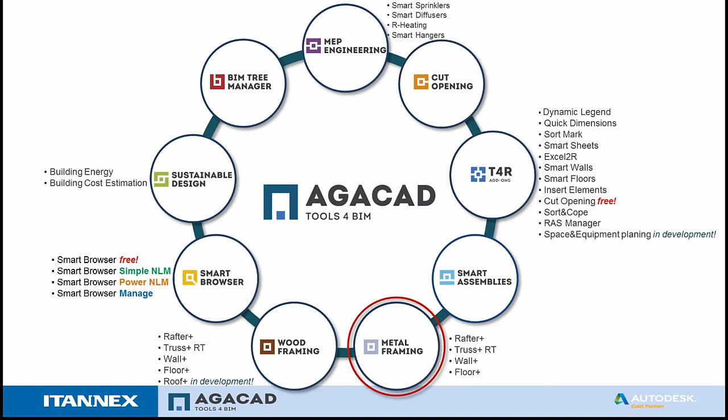And in a very similar scenario, we have Metal Framing. Again, here in this part we have 4 solutions: Rafter+, Truss+, Wall+ and Floor+. Wall+ has intuitive automated framing functionalities for metal wall frame design and for making shop drawings automatically. Actually, at the moment we work on a new version of Wall+, so in the near future we're going to release a new version, and today I will try to show you new features of the new version that is coming soon.

Also, after making the frames, anytime you can make an export to CNC machines if it's necessary. At the moment, we did an export to Metrol, Howick, and Pinnacle machines, but it can also be done to any other machines if needed. Then Floor+ goes for metal floor framing automatically, and it generates floor metal framing members, including joists, bridgings, blockings, rims, noggings, and at the same time it makes shop drawings automatically.

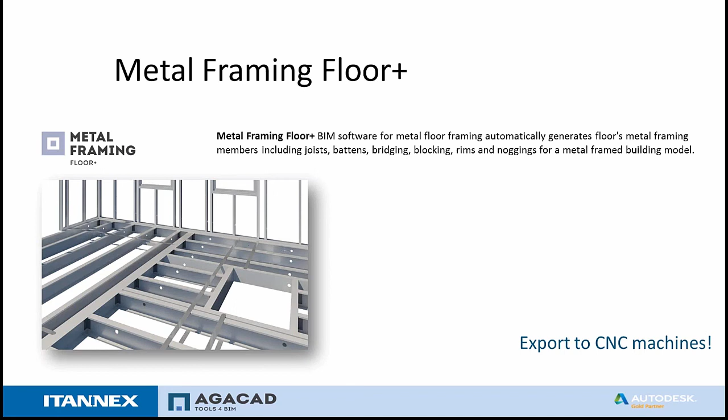Then Rafter Plus: this application gives you the opportunity to easily make steel elements on the roof according to your roof shape. So in general, you can create any roof shape, or it can come from architects, and you can very easily frame the roof according to your rules.

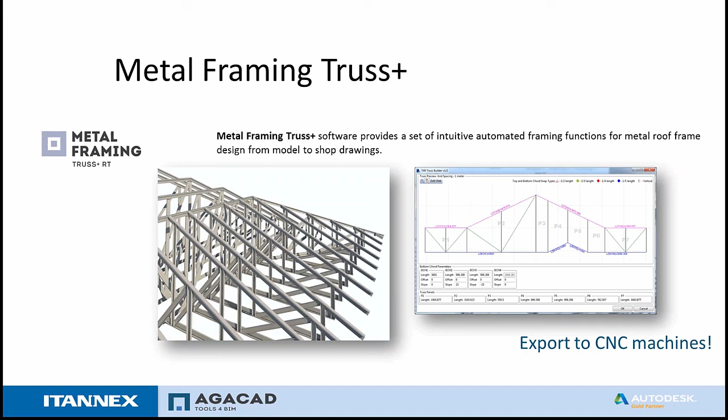Then Truss Plus, it goes for making trusses, and again it goes for making shop drawings for the created trusses. Okay, so now I'm switching to my Revit project. You can find metal framing in the dock tab in the store. Here you can find, for example, Floor Plus M or Rafter Plus M. So as you can see, in general, Rafter goes for the wood, and if it has Rafter Plus M, it means that it goes for the metal framing.

So in general, you can very easily install and try the product. After installation, you can find the products in the separate Tools for Revit Metal Framing tab. And here we're going to start with Wall Plus M. Now, the first thing that you have to know about this product is that it can support C+C and C+U systems. I will show you our sample project with different systems.

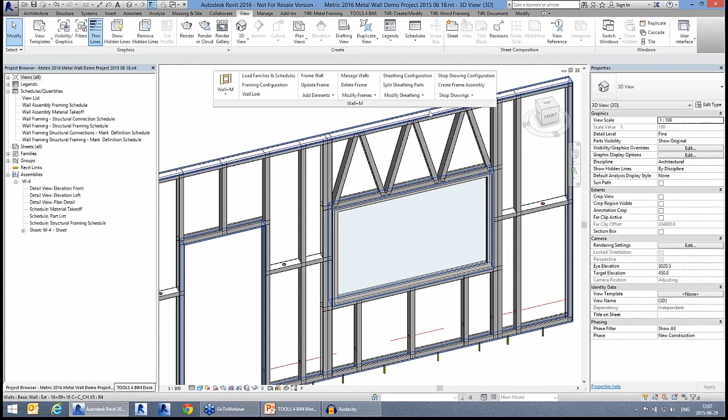So as you can see, this is an example of the C+C chamfered system. The tracks and the studs are created according to this. We have C profiles for the studs and C profiles for the tracks, and the ends are chamfered, as you can see here. Then we can have one more system. It's like a regular C+C. Again, there could be different connections used in making this frame; in this case, this is a totally different connection from the one we saw previously.

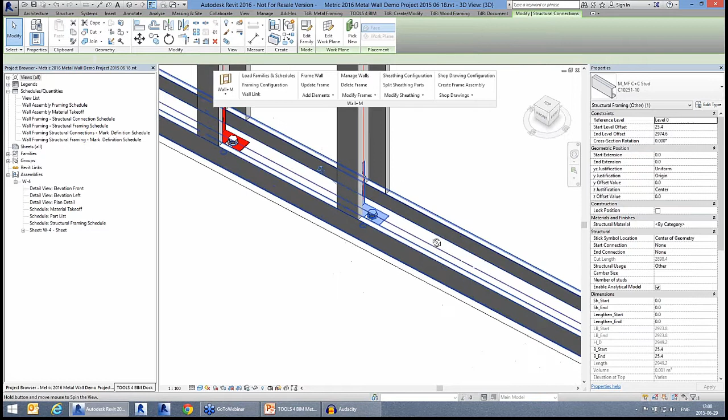Actually, you can modify the families of those connections, and you can create your own families. We provide examples of the families together with the products, but in general you can use your own if needed. Then we have C+U special framing. Again, for the tracks we use a U profile, and for the studs we use a C profile. Okay, and as you can see here, we can have such cripples above the opening.

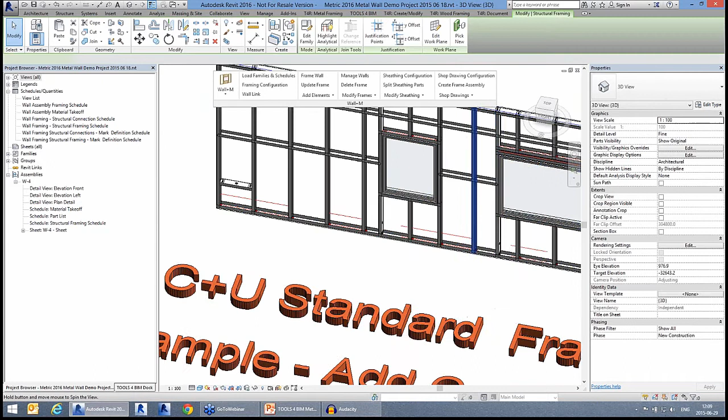One more example is C+U standard framing. Here we can take a look again. We have connections between those studs and tracks, and this is how the system looks in C+U standard framing. One more example is C+U special frame. Okay, so it can look like this. Also, the tool can support different shapes of frames. And one more example with added connections for C+U standard framing.

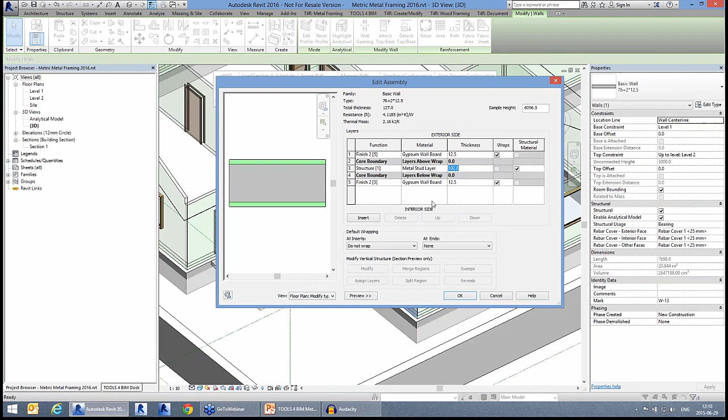Okay, so now let's start from the beginning, with a brand new project. I'm going to show you different scenarios. This is the wall. Actually, this wall just comes regularly from the architects. Let's take a look at the wall type. As you can see, there are 3 layers: a metal framing layer and 2 gypsum wall layers on both sides. So to this wall type we're going to add C+C profiling. In my case I have just one layer for the metal frames, and here we're going to add C+C profiling.

What you have to do is just select walls from the project and press Frame Wall. After framing the wall, the tool will take parameters from the wall type. The tool will look at what kind of wall types you have at the moment, and what the thicknesses and layers are, and then the tool makes a connection between the wall type and the configuration from Wall Plus. In my case, I did a link before, and now the tool is just framing the wall segments.

So in general, after preparing sample configurations, the most popular configurations used in your projects, you can very easily save those configurations on your computer. Later you can share them with your colleagues, and you will be able to use those settings in a new project. Okay, so 2 walls are already framed. In my case, I have selected 5 walls from the project.

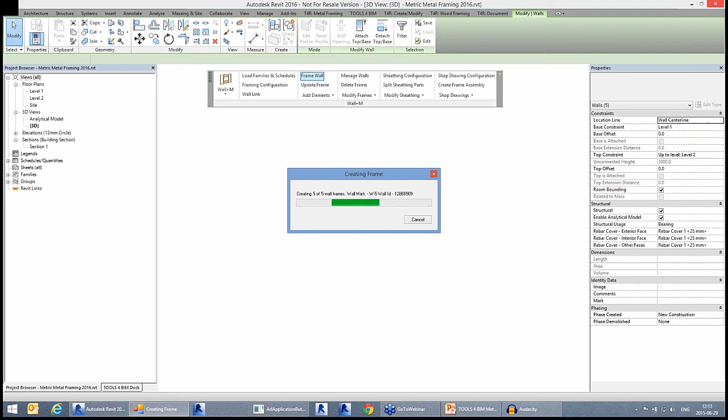And that's it. Here we can take a look into the sample with C+U. As you can see, for the tracks we use U profile and C for the studs. Okay, then we can take a look into one more example. Here we have C+C profiling.

Now let's check how it works, and actually how we can improve and how we can change configurations for framing the walls. So framing configuration is the main button in Wall+M. Here you have to predefine your configurations, and first you have to start with configuration type. So it will be used for the main frames or for the secondary frames, because in the wall you can have two layers, or actually there are no limits. You can have even maybe 3 or 4 framed layers in the wall.

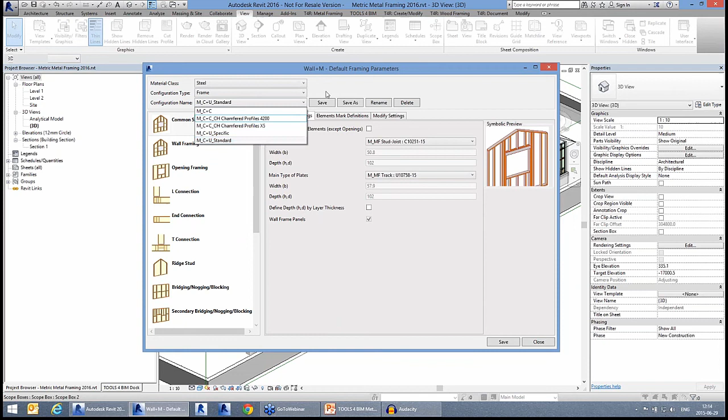So here you have to choose configuration type and then configuration name. Those configuration names come together automatically with the software. These are the most popular configurations that we have created, but anytime you can save it with your own name and save it for your future projects.

Now in the common settings, you have to predefine what families you're going to use for the plates and for the studs. Again, those families are our created sample families. They come together with the software after loading the families into the project. But anytime you will be able to modify that if it's necessary.

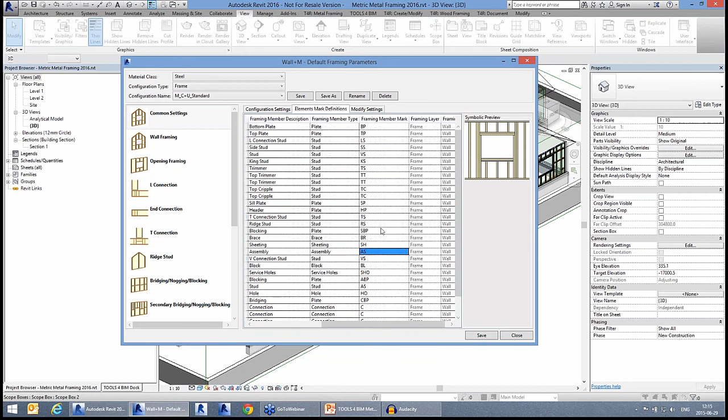Now with the element mark definitions, the tool provides you a list of subcategories and the element namings for all framing members. So in general, you can add your own names. This is very important, because descriptions and the member names will be used later in the schedules. The same as framing member mark, because according to this mark, the tool will remember all your frames.

Now, in the wall framing, you have just to choose the distances between the frames, how you want to distribute them. Then you have to predefine the top plates. There will be one top plate or two or maybe three top plates. Then there are settings for the bottom plates. Actually, it's very good to use Wall+M, because after any changes you can see how it will look in the end. So there is a symbolic preview here in the right dialog. If it's necessary, you can add additional offsets from the wall base or top.

Then with opening framing, you have to predefine how your windows, doors or other openings will be framed. And here you can predefine settings for the windows, so what kind of king studs you're going to use, what kind of header type you're going to choose, what will be the sill plates, trimmers, other studs or additional offsets around the window.

Then there are settings for L connections. You can predefine settings for L outer corner or butt outer corner, and the same we have for the inner corners. So now you will be able to choose and to predefine configurations for different corners. It could be predefined for the inner corner, but at the same time for the outer corner. Then we have a tab for end connections. Then we have a tab for T connections.

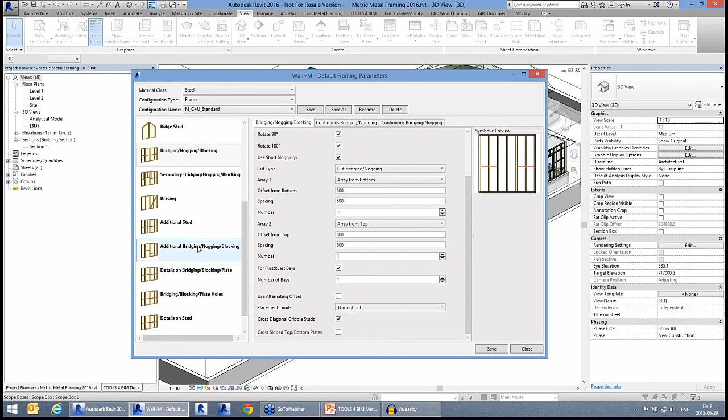Okay. Then we have bridgings and blockings. As you can see in my example, additional bridgings were automatically added. So here you can predefine the rule where exactly you would like to add the bridging or additional blocking. And it can go through the wall segment, or it can go only through the openings if it's necessary. Then there are settings for adding bracings, additional studs, additional horizontal elements, and then there are settings for adding details.

As you saw in my sample, I have used different details in the project, different connections. So here you can say that, for example, there should be anchors added in the middle between the studs, or there should be angle connectors added on the open faces of the stud or plate. So here you can predefine different rules, how exactly you would like to distribute connectors, anchors, or some bolt holes, and so on. Then we have a separate tab for adding the service holes for the wires, for example, and then for adding additional details or holes for the studs.

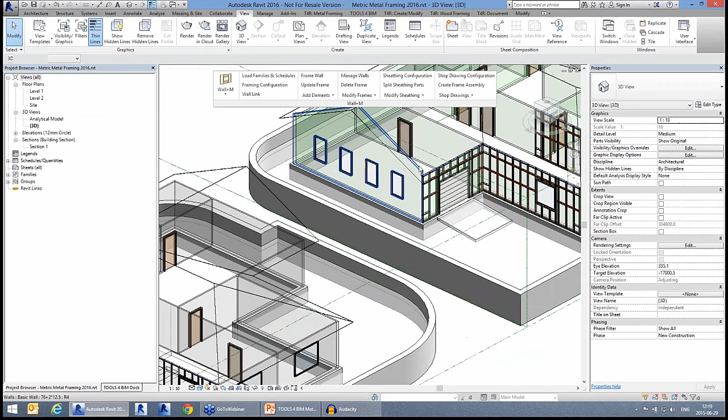After predefining that configuration, you can save it under your own name, and then you need to make a link between your wall type and configuration. It's very easy - the tool shows you the wall types that come from the project, and you have to choose what exactly you're going to put into every layer. So let's say into this layer I'm going to add the main frame and use this C+U standard configuration.

Then there are sheetings from both sides, and in the new version coming in a few weeks, there will be an option to predefine sheeting configuration, because you will be able to split sheeting into separate parts. In my case, I've already added sheeting here, and I'm going to split the sheeting into separate parts.

One more example - a link between this wall type, and in this part of my building, I'm going to use some C+C template configuration.

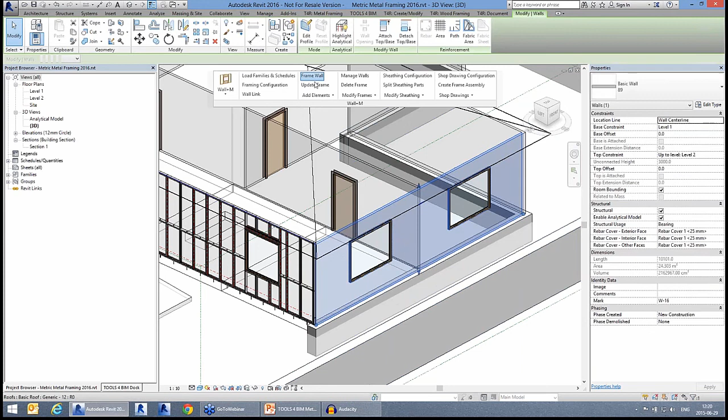Just one more example, I'm going to frame this wall to show you that for different opening sizes or window sizes, you can predefine different headers and different framing configurations. As you can see on the left side, the headers above the window are just straight, but here above this window we're using a varying configuration, because this window is larger than that one.

Now what else can we do with such walls? We can add any additional elements we need. If we look into add elements, we can add additional studs to custom places in special project areas, and we can add additional bridgings or blockings.

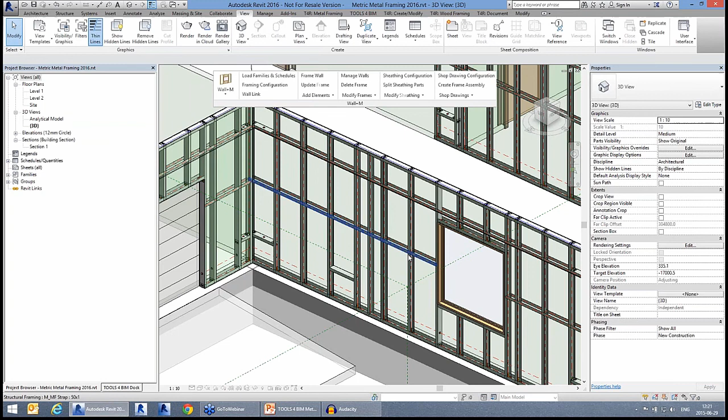You can very easily predefine the offset. Then we can add additional bracings, but also, if you make any changes in the project - let's say if I'm going to move a window - anytime you can select any frame from the wall and press update frame, and the tool will easily update the frames according to any changes you make.

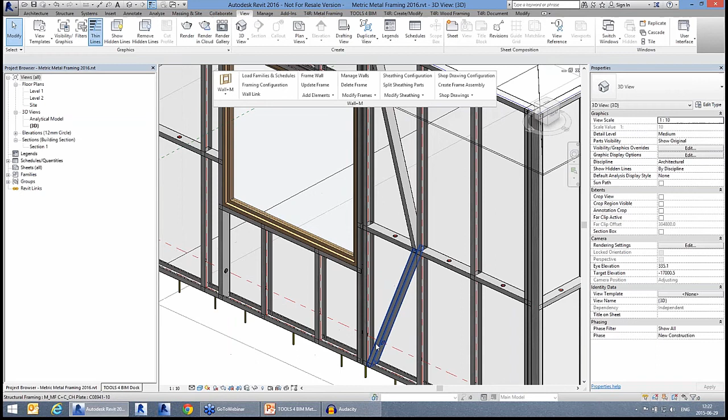Now if you want to add additional bracings, you can very easily add them between the horizontal elements - like this. You just need to click the points where you want to add the bracings, and the tool will add them between the horizontal points you select from the project.

Now if you'd like to make changes in configuration, anytime you can go to modify frames, then modify wall framing, where you can modify the opening framing. We can select and say that top and bottom trimmers should be added for this opening, and after pressing OK, the tool updates the opening framing only for this selected window.

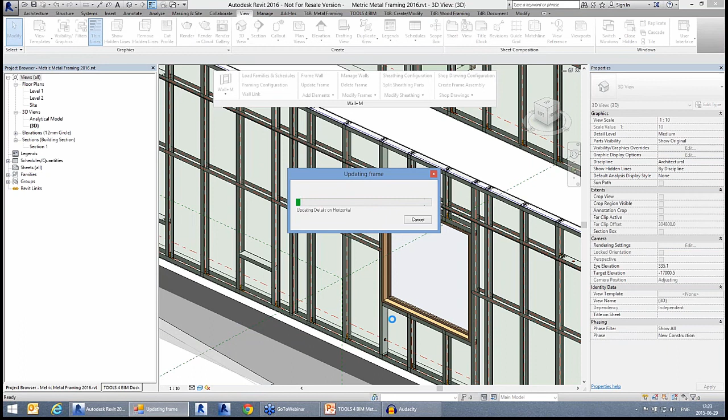So in general, you can predefine a common configuration used for all walls, but anytime you can still modify some custom openings or special parts of your project. And the trimmers are automatically added.

Now, as you can see, the new version has more options for modifying sheathing. With the current version, if we switch on parts, the tool creates the parts automatically. If we look at the parts, this part is a sheeting - the tool adds information to it automatically. But if we look only at the sheeting, it's not divided into segments - it's just one sheeting, one part for the total wall segment.

In the new version, we've added the possibility to split the sheeting into separate segments. First we have to go to the sheathing configuration, where there are settings for how you'd like to split the sheeting. You predefine the sizes for the vertical elements, then distribute them horizontally - you can split it vertically and then horizontally.

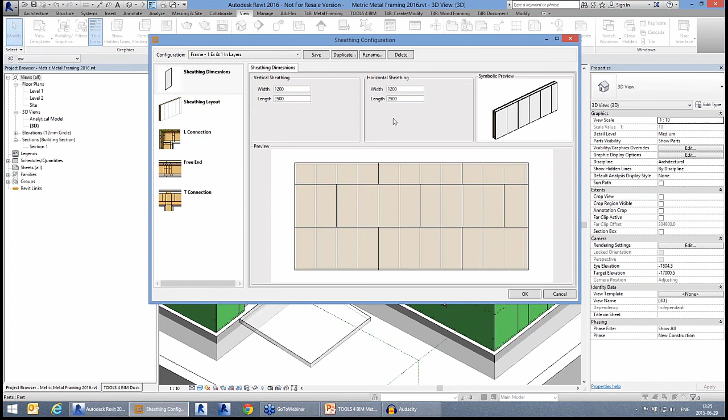Then with the sheeting layout, you'll be able to predefine settings for different sheeting segments - it can be inner sheeting or outer sheeting, and it could be secondary or the first. So in general, we've added an option to have even two sheetings, not just one from one side or the other, but two sheeting segments from the outer side or the inner side.

And there are different options for how you can work with them. If you want, you can add some additional offsets. Here you have to predefine the rule for the direction of the sheeting.

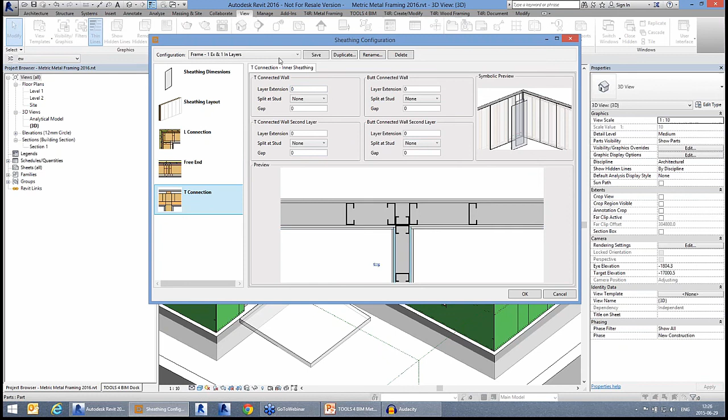Then we have L connections. There are different options for how the L connection should be created for the outer or inner corners. Then there are settings for the free end connections, again for the inner sheeting or the outer sheeting, and the same with the T connection. Again, you will be able to save the configuration under your own name.

After making this configuration, you will be able to split the sheeting into parts. I have to pick any frame from the wall, and that's it. The tool has created the sheeting, and now if we take a look into the sheeting view, as you can see, we already have splits in this part of our project. Okay, let's do the same and split this part of the wall, and that's it, we have already split it.

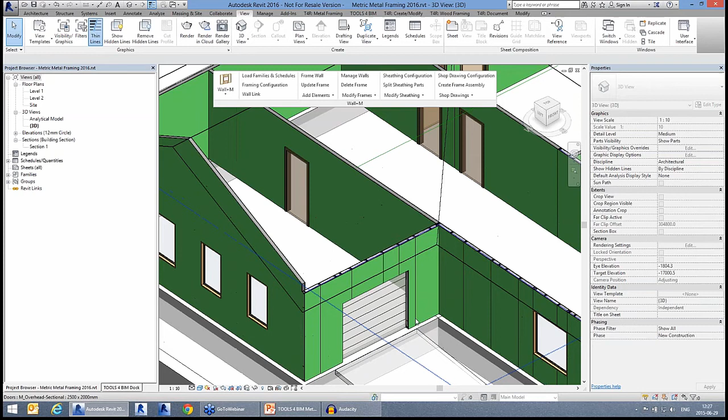Now if you want, you can modify the sheeting. You can make small adjustments and predefine how exactly you would like to make an area from the left side, from the right side, or from both sides. In general, you will be able to modify that after splitting the part.

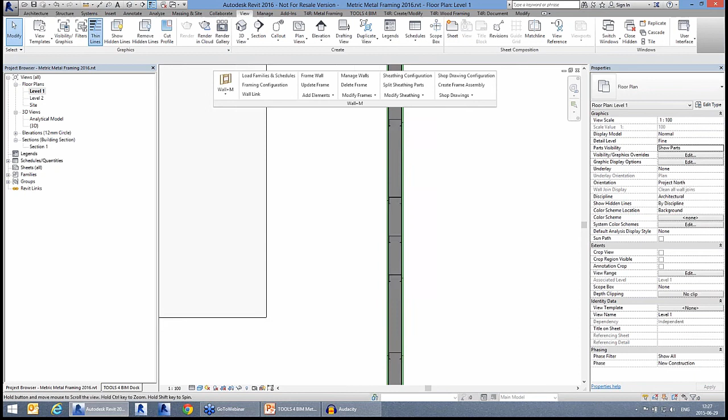Again, if we take a look into the plan view, we can see that here we have parts, and here we have splits between our frames. After making those changes, after framing the walls and splitting the sheeting, we can make shop drawings.

In general, we have to prepare our own shop drawing configuration. You have to choose what kind of views you would like to have in your assembly, because the tool is going to create assemblies. The tool will collect all frames, connections, and the sheeting, connecting all elements from the wall, and prepare shop drawings automatically.

You have to predefine the views, so you have to predefine what framing layers you're going to present in every view, and then the view template. It's a regular view template that comes from your project, and you can predefine the graphical design of it.

Then you have to choose the title block, the part lists, material takeoff, and the schedule templates that come from your project. You can predefine your own schedules with your own design, and the tool will use those schedules as templates for making your part lists or material takeoff for every wall.

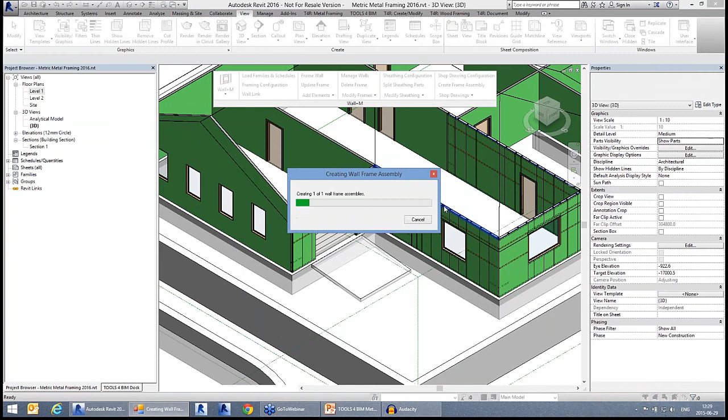Then we have to choose dimension types, just from the project, that I'm going to use for the vertical, horizontal elements, and for the studs. And that's it, we can save this configuration, and I can create my first assembly. I have to pick any frame from the wall, and now the tool is going to create shop drawings.

So the tool will collect all elements from the wall segment. It will collect all the frames, connections, and the sheeting, and it will prepare shop drawings. It will create a 3D view, front side view, one front view for the frame, one front view for the sheeting, and then it will create schedules.

And the tool will add dimensions automatically on every frame and on every sheeting element face. Okay, I think we're finishing with making the assembly for the first wall.

After creating the assembly, we can see that this is a regular assembly, and the tool added automatically some additional information, like for example mass, so you will be able to know what is the weight of your prefabricated assembly. And that's it, we can take a look into the result. This is our 3D view, and then we have a front side view with dimensions.

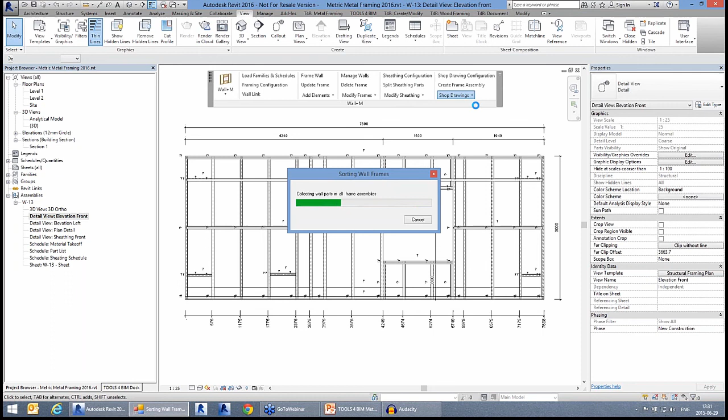One more thing we have to do is renumber our structural frames. We have to press on sort structural frames from the Wall+M. The tool will renumber elements according to its purpose and length. It will be visible in the front side view, and the same information will be visible in the sheet schedules.

Okay, we're going to do the same with connections.

Okay, let's check other views. So this is our plan view, then we have front side view, okay, with the sheeting layouts. Then we have material takeoff, then the part list, and then a separate table for the sheeting.

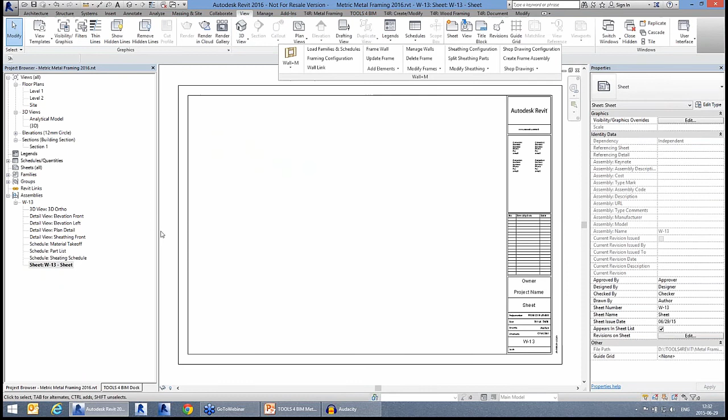Now we're ready to place this information to the regular sheet. Here I'm going to add the regular front side view, then the view with the sheeting, then plan view. And here I'm going to add the schedule with the sheeting, and then the schedule with the regular part list. So we have all information about every view and the wall.

Now we can come back to our shop drawing configuration, and we're saying that this sheet will be used as a template for making our future sheets.

Now I'm coming back again to my previous view, and again we can create assembly for another wall. So now the tool is going to do the same thing: collect all views, collect all elements, prepare all necessary views, add dimensions, add tags. At the same time, the tool will place those views into the sheet automatically, taking the previous sheet as a template and placing the views into the same place as in our template sheet.

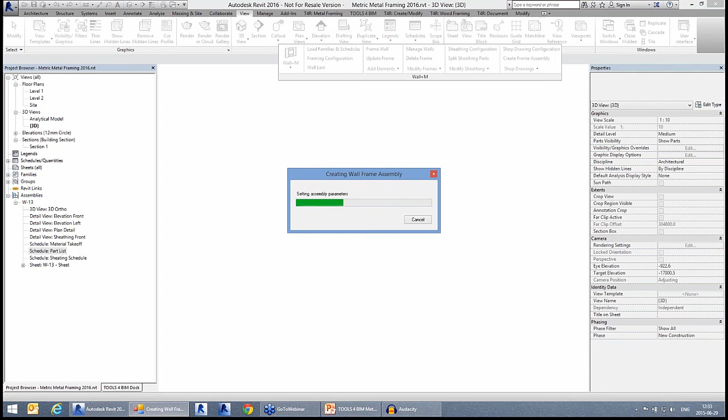Okay, and that's it. We can just open our final sheet, and here we can see the result. So you can imagine how much time you can save in preparing such views and in preparing such framing.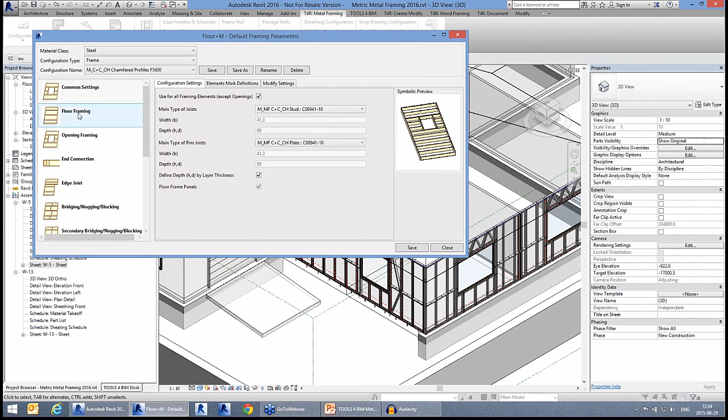You have to predefine the distances, you have to predefine the families that you're going to use for the rims and for the common joists, then how you're going to frame the openings, what will be the end connections, if you want to add additional bridgings or secondary bridgings, noggings and blockings. So there are very similar settings, and then you have to make a link between

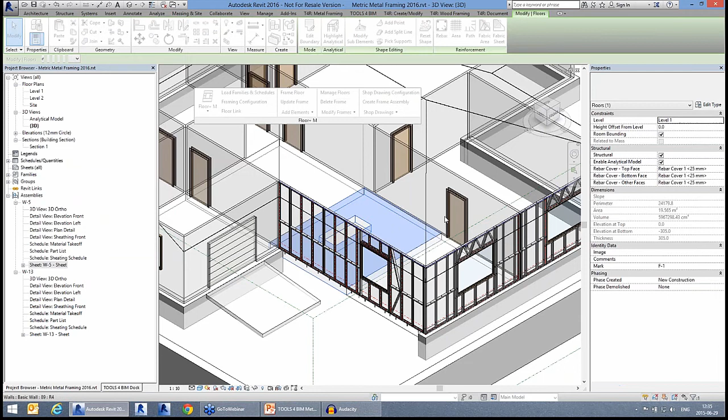your floor panel and your configuration. In my case, I'm going to put the main frame in the top and then battens in the bottom of this floor segment. And that's it. We can just press on frame floor, and now the tool is going to frame this floor, and then we're going to add battens into the second layer.

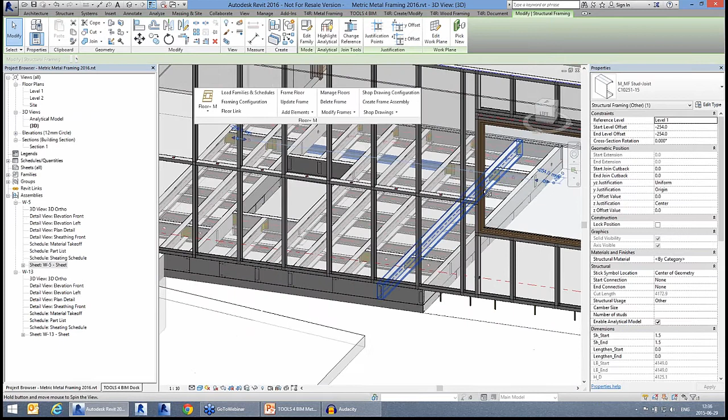Okay, and we have the floor frames. As you can see in the connection, we have details, so there are L connections added automatically between the frames, and then let's add battens. And that's it, the battens are added automatically below this main floor segment. And the same scenario as it was with the Wall Plus, you can make shop drawings, and you can make assembly.

The tool will add dimensions automatically, and the tool will put the views into the sheet.

Okay, now let's switch to Valence's screen, and he's going to continue with framing your roof, so with adding trusses and with making rafters automatically.

Okay, hello to everyone. I hope you see my screen now. Yes, we can see you.

Okay, so as Renata told you, I will show some solutions for how to frame roofs with light gauge steel elements by using our solutions. I will demonstrate Rafter Plus M and Truss Plus M tools. So let's get started.

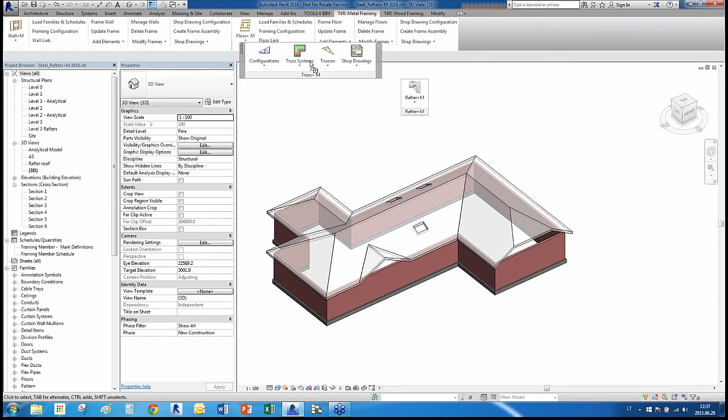This project is a sample project where I will demonstrate the Rafter tool. I will just begin, I select the roof, and okay, so this is the tool Rafter Plus M, and again you have to load families to your project first of all, and then you use all the possible commands to create your elements.

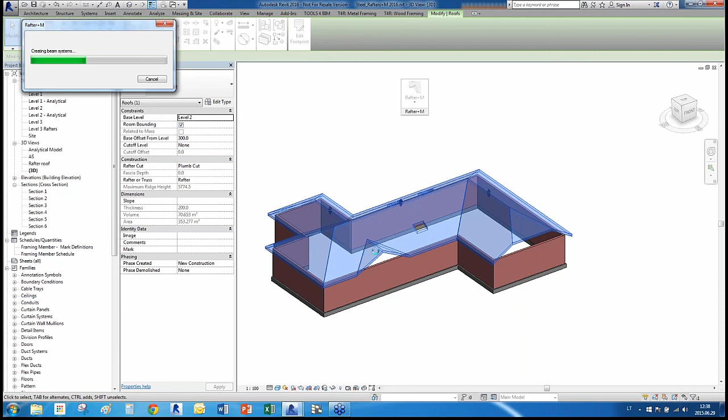I have already loaded families, and I will now create common rafter systems on the roof. Here I have end connection selection options, beam type options, and spacing options and where to place it. I will leave it like it is now, click OK, and we will have a beam system on every slope of the roof with predefined spacing.

And you can see now that we have a beam system on every slope of the roof with fixed distance between them.

So let's add other elements, and we will update the rafters, openings, and so on later. Next, I will select all the beam systems of the roof and insert hip and valley rafters in the intersections of the beam systems.

I select the end type, the type of beam I will use, so I'll use double elements, and click OK - this is for the valley rafter. You can insert one valley or hip rafter at a time if you select beam systems near each other, but I'll just select and insert all hip and valley rafters at once to fill the whole roof with the necessary elements.

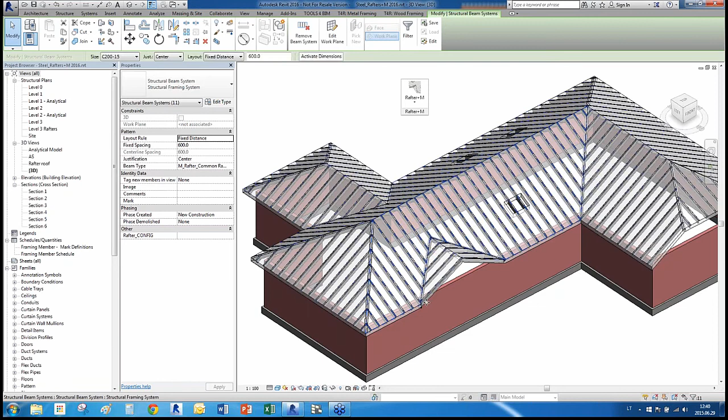Okay, so we have here a hip rafter inserted. I have valley rafters, and it's all over the roof in every necessary place.

Let's insert other elements. I will select two beam systems, on the slope and the slope, and insert a ridge beam between them. So again we have a configuration window - we choose the vertical positioning option, the type of beam, the distances, and so on. After we click OK, we will have the ridge beam inserted according to our configurations.

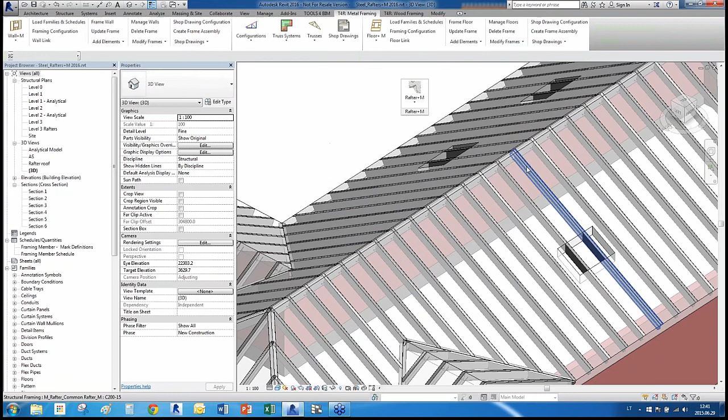So you can insert between two beam systems, or between two rafters. Let's say from here to here - you can insert the same ridge beam. Now we have the ridge beam inserted, and we will just update later.

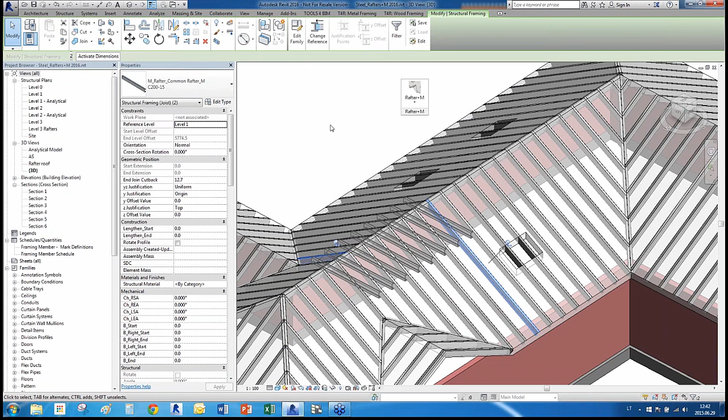Now let's insert some collar beams. I'll select two rafters this time, or I can select two beam systems, and select insert/update collar beam systems - you see it's the same function for inserting and updating. Again we have a configuration window: the vertical distance, the type of beam, the connection type, and let's click OK. So we have collar beams inserted here now.

We can update - let's say I'll select the beam system and rafter again, and prolong this, and change something more, like updating this beam system and changing the distance, let's say 900, and it will move down. So you can update your elements at any time.

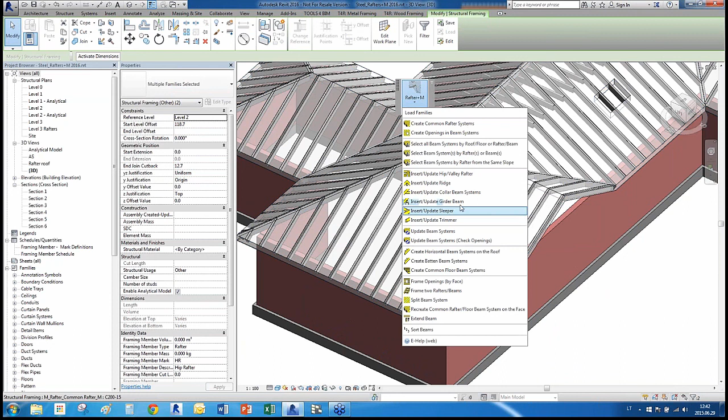Let's go to other elements. We have a girder beam option, so let's insert a few of them. I'll select two rafters and select insert/update girder beam. Again we have a configuration window: the girder placement options, the type of beam. I will enter 0 value here - this is the vertical distance because we don't have the possibility to insert a girder here, so we'll pick a wall and use it for the vertical distance of the girder. I'll click OK.

I will put it in the middle of a wall, but I can also enter values to move it left or right. Anyway, now we have a girder beam - we can insert it like this by using wall type.

If we have the same level of girder, we can select two elements, select insert girder, and choose the option pick source girder. For this I will select this girder, and I have automatically the vertical distances set up. I'll click OK, and now we have a girder inserted at the same level as the previous girder. So we can just go around our whole building using these different options for how to insert them.

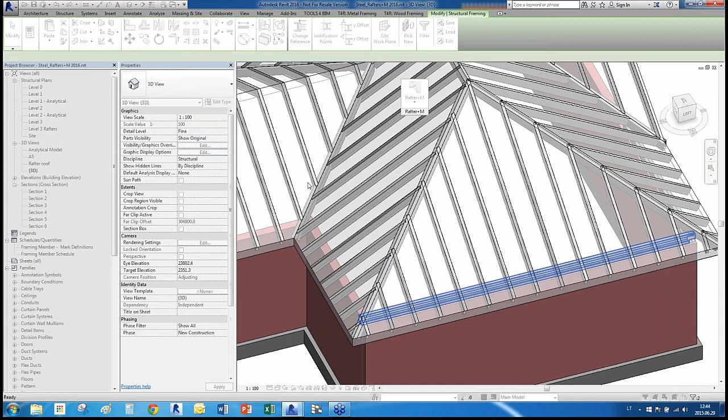I'll select the same option here and click OK, and we have some warnings to notify if everything is like we want it to be. So we can insert girders and go around the whole building - we can insert them here, or here as support girders, and so on, just using the configuration window.

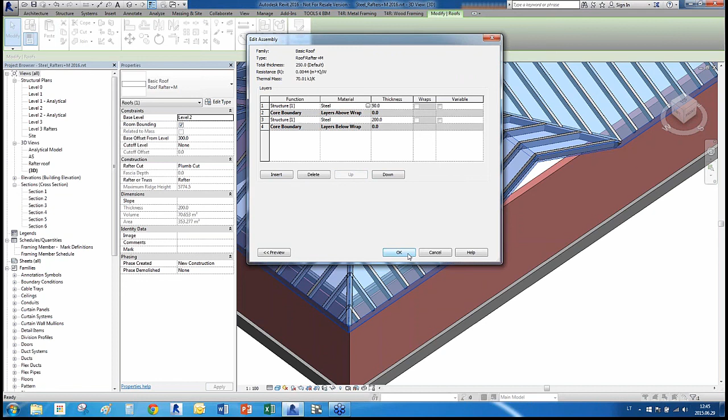Let's change the structure of the roof a bit. I will insert another layer for batten beams - the thickness will be 50 millimeters, and I'll just add material and click OK.

So I'll change the configuration and insert batten beam systems. Now we have the type of batten beam, the spacing - let's change that, let's do it horizontal. Let's click OK, and we will have batten beam systems perpendicular to the rafters, or we can insert them parallel to the rafters - it's up to you.

If you need some air ventilation for the roofing, you can add parallel batten beam systems instead of perpendicular ones.

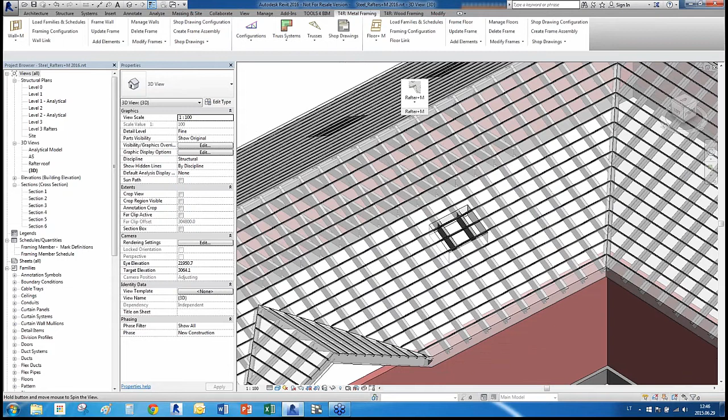So again, on every slope we have the chosen type of batten beam inserted on the top of the rafters and all over the roof. And now we see that our elements are going through the openings, and the connections are not as they should be. So we will update these beam systems. I will select this beam system, and I will select update beam systems and check openings.

So okay, yeah, and you will see that now our rafters are updated according to all the constraints we have here, like the ridge beam, the valley rafters and openings. So we will have now some adjustments. Okay, so we have now here rafters updated according to the opening. We have rafters updated according to the valley rafters, according to the ridge beam, and so on.

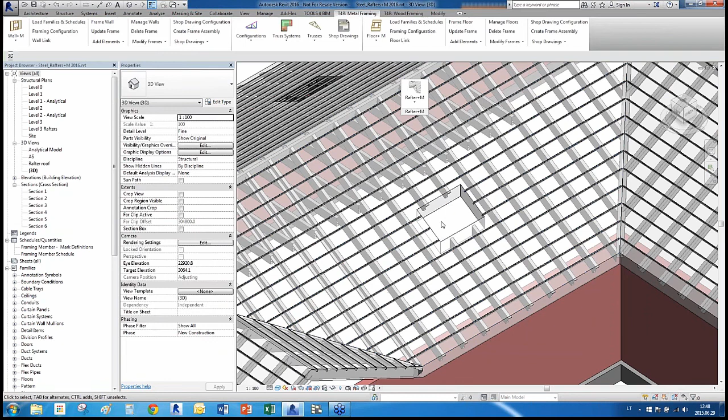So you just need to select the beam system and click update with openings or without openings, and just wait until they are fixed. Okay, so we have the opening here now clear, and let's do the same on the other side. So we select the beam system and check openings and click OK, just to have here a good view as it should be.

Okay, that's a big beam system, so we need to do a lot of cutting of elements. Okay, so we have now both rafters updated, and we have openings updated, and if we move openings, we can again update these rafters and check the design process.

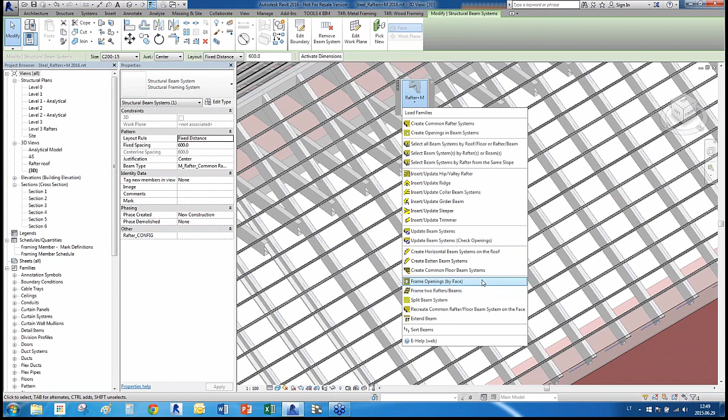Okay, I select the beam system, and now let's frame the openings. We have a separate command for this. Let's click OK, and we have now framing elements inserted between these two rafters, and we see again that rafters are intersecting with framing elements. So let's select our beam system and update again, and yes, now we are just going to the edge of the framing elements.

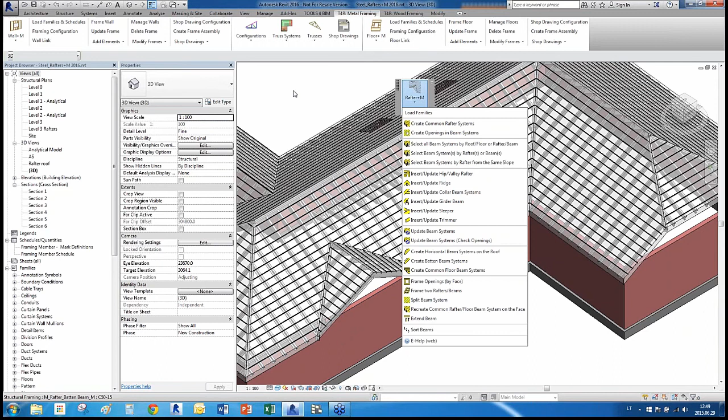So let's now see some other tools. If on every slope we have a beam system like this, we have only one option of justification and layout with this one distance. But if we want more flexibility to have different spacings in different areas, we can do this with our command split beam system.

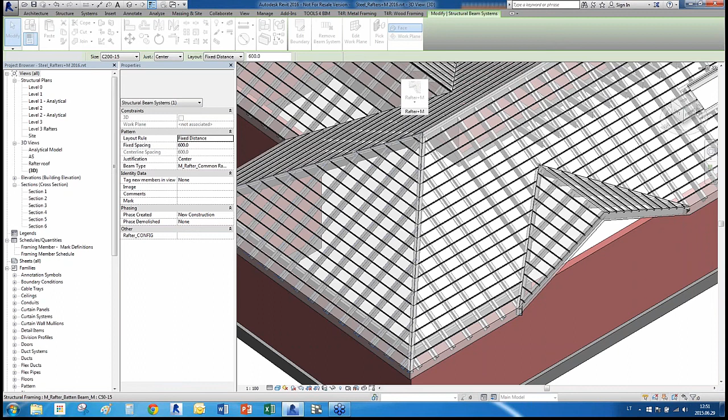Let's try to use this on this beam system. Let's use split beam system here, and you will see that now we have a configuration window with a defined spacing. We can set up the distances from the edge of the roof, and we have a distance of 1000 in the middle, so we can insert an additional beam. Let's click OK and see the result. You will see now that we have 3 beam systems which you can configure as you want.

I have here a beam system, I have a beam system in the middle of one beam, and we have here a third beam system. So we can set up different spacing, and we can divide these beam systems again. And let's go to the plan view. Let's see.

I will select this beam system, and I will select this rafter, and I will click again split beam systems, and I will enter here the value for splitting, and again I will insert an additional rafter. So let's see. Now we have a different distance of this rafter, and this rafter distance will be the same now from the edges of the roof.

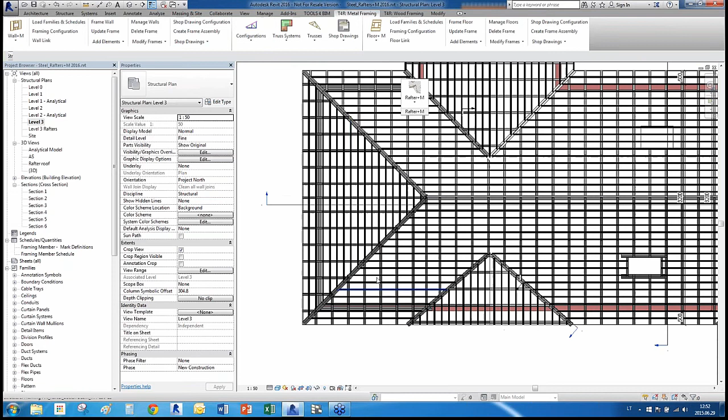So if it's my design wish, I can do it like this with the help of this tool, because in simple Revit you don't have these options to split beam systems. Okay, so we have here again a beam system and the beam system here, so you can set up different spacings and so on, align all the rafters and get more flexibility in your design work.

Okay, and the last option I will show is to sort beams. When you click sort beams, it's the same as in the wall framing solution. You had some sorting, so you have sorting also here.

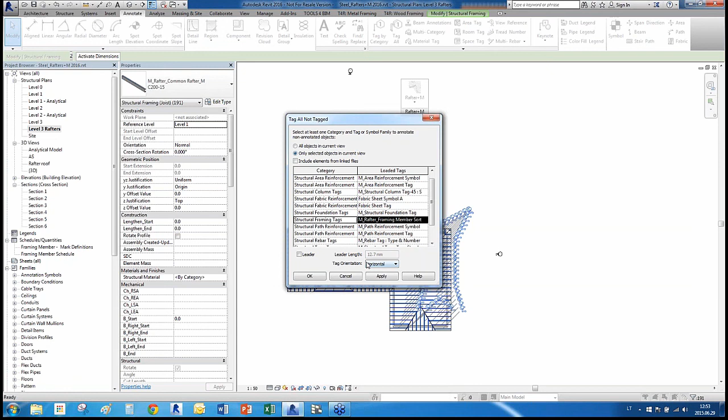And after sorting, I will add some tags, tag all, and I will filter this and leave just structural beams, and I will now add some structural framing tags. Okay, horizontal and without leader, and click OK. And you can see now that we have different sorted markings for the rafters and for the batten beams and so on. So it's just a quick renumbering of the elements, so it saves you time also.

Okay, so that's basically what I wanted to show you today. We have some other options, but these are the main commands I showed you, so I hope you get an idea.

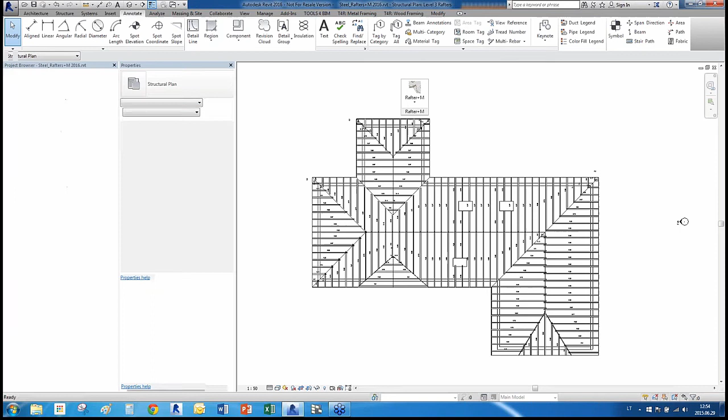Okay, and let's just switch to another solution now. I'll close this one. Let's go and do something with trusses. Let's see how they work. Again, I have a sample project here, and okay, I'll just take another tool. Let's place this back, and let's use the truss tool.

So we have here a truss plus M tool. We have configurations here for trusses. We have tools to create truss system grids to quickly create something like this, and we have tools to create separate trusses, to insert trusses, to create truss types by using model lines, and to copy, to modify trusses and so on. And we have the last option here to create shop drawings, quick drawings, to mark elements and so on, to export to CNC machines. Okay, let's just overview some configurations.

First of all, again, you just have to load truss types. When you open the truss database manager, here we can create trusses without going to each of the trusses and assigning some elements and creating each of the truss types. You can create these types here. You create a type, you select the types of the elements for framing elements, and after you click create, you have all these types of trusses created with picked configurations, picked framing family types.

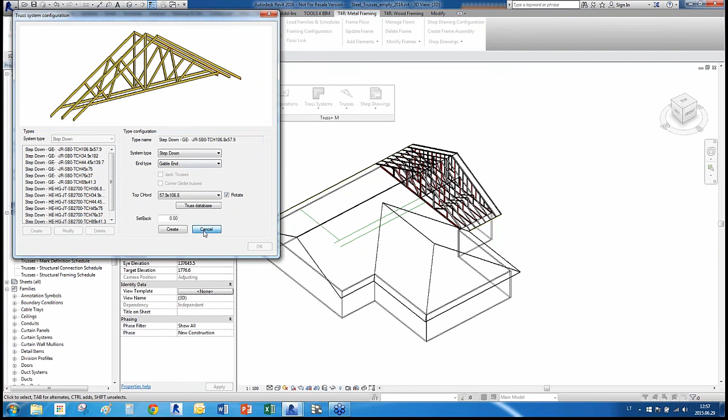Okay, let's see the truss system configuration window. Here you have options to create truss systems, what kind of truss systems you will have. So if I create one, I can select the solution, if it will be gable end or hip end, what kind of trusses we will use for this, and so on. So you create configurations for truss systems and you will use them. I will show you this one in action.

And yeah, truss design settings, the last configuration window. Here we have some options for how to create jack and corner girder trusses. We can configure when vertical webs and diagonal webs will be inserted, according to their minimal length. So we can leave it as default, or we can insert our values here.

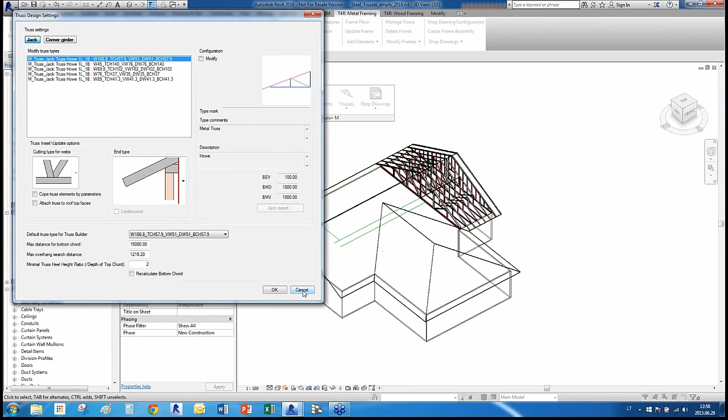So these are the configurations, and we have here some ending types of trusses. We can select this one, and we select the default truss type for truss builder. Truss builder is a tool to create truss types inside Revit, not by using the Revit standard family editor. I will show you how it works later. Let's just get started and insert some trusses into this roof. I have already created some of them here, but let's just see how it goes.

So first of all, I select the roof and I select insert truss system grid. You will see now I select the edges, the boundaries of my truss system, and okay, I'll click OK, and now you see that we have some suggestions from the tool. It suggests we use this step down truss system, or we can choose another one if we want to use other profiles and so on, or maybe we will not use this one.

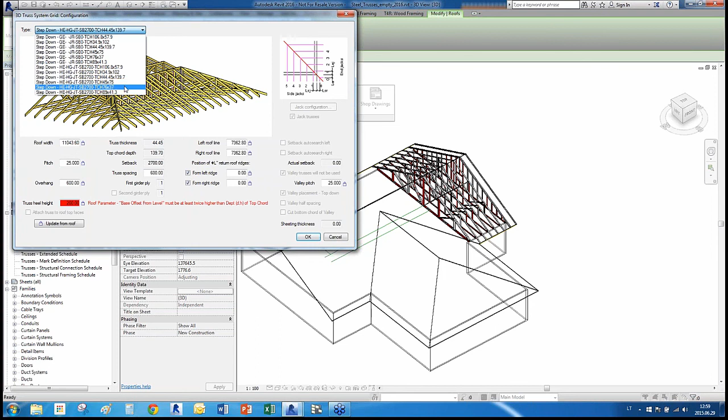Okay, so let's just go back and choose this type of truss system, and we have here already values from the roof: width, pitch, overhang, and so on. Okay, let's click OK, and let's see. The software will insert the truss system grid. It's just a grid, not the trusses themselves, but we create a grid and we can look it over and see if that's what I wanted to model.

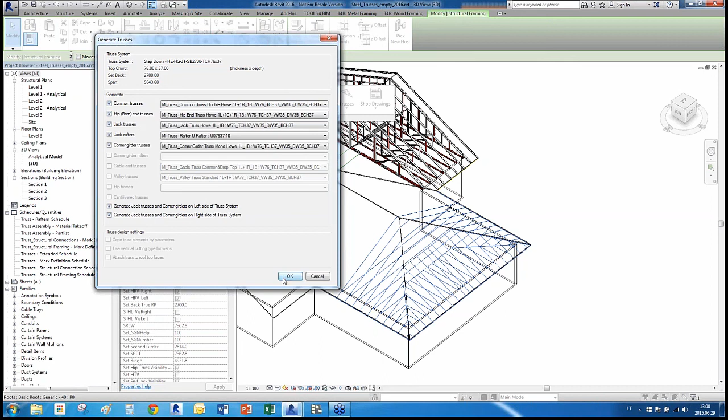If it's okay, then we just generate trusses, or we can modify the truss system grid. We can change some truss spacing or insert another first girder to make them double and so on. So if it's okay, then we generate trusses, and we have a configuration window where we can select the truss types we can use, like fink or howe or modified queen or whatever, for common trusses, for hip end trusses, for jack trusses, and so on. So we pick the truss types and click OK, and now we just need to wait until the software inserts the trusses in every place of the system grid.

So this is one method how to create trusses. You create a truss system grid and you generate trusses, or you can insert truss by truss in the places you need by using other very good commands like insert truss by model line or create truss type by model line. So I will show these steps also later.

And you see that all the trusses are updated according to the roof. So here we go, just exactly the roof shape is, and you don't need to make a lot of sections and start and ends of framing offsets and create a lot of truss families, because the tool is designed so to help you with this. So it automatically adds some elements if they need to be there according to your configurations.

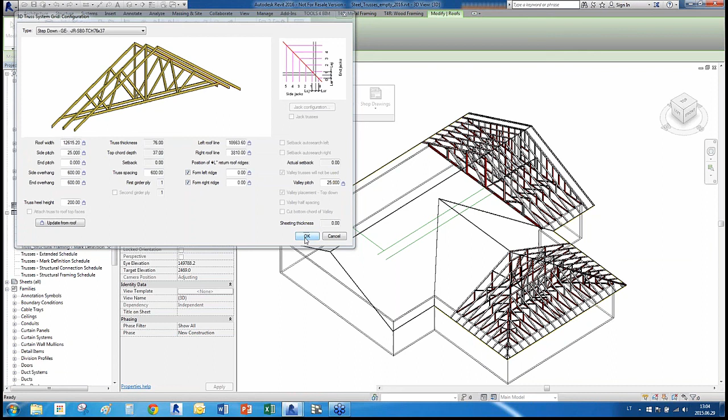But let's just get going and let's create another truss system here on the other side of the roof. Again, we select the edges of the roof. Okay, and let's click OK. And we have here a step down gable end truss. Okay, I will leave default configurations. Okay, we have a truss system here, and we generate trusses again here. We just need to overlook if we have the right types of trusses, if it's what we want.

Yep. Now we will create other trusses, and we will copy some trusses, and we will auto copy some trusses. You see here model lines, some drawing I drew already, but I'll show you how to use them. So okay, I have a truss. I will select another command to copy array trusses. Let's just use 6 of them and update from the roof. And yeah, so we'll insert here a few trusses the same as on the other side.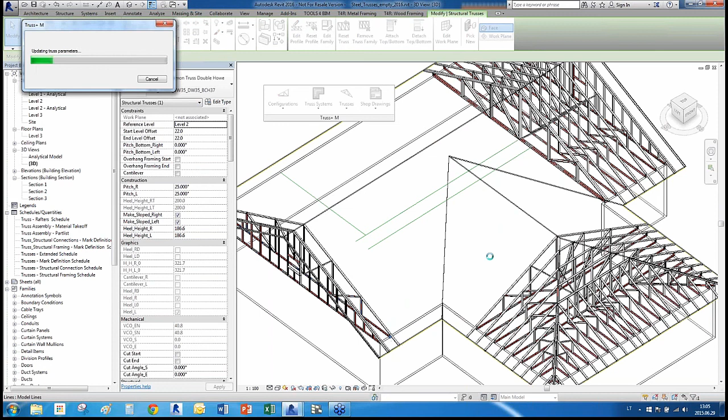Okay, so you can see that this truss was updated according to the roof because we don't have such an overhang in this place. Let's do the same with this truss. Again, auto copy and okay, 4 trusses and update from the roof and to the left. I know already the distances, but anyway, you know the distances in your project, so just fix that according to your situation. Okay, and this one was updated according to the roof.

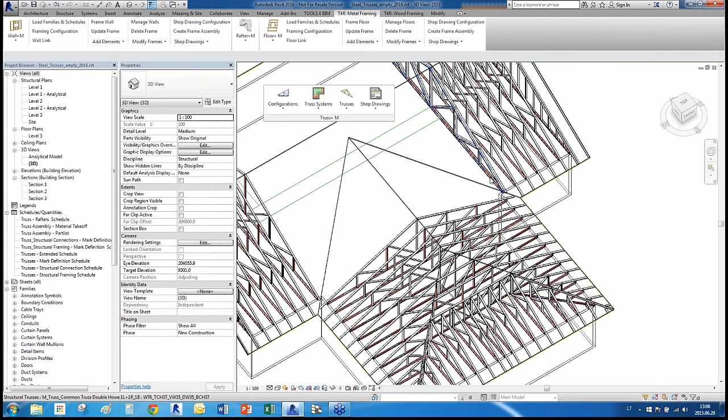And now I would like to insert truss between this and this truss, or I can auto copy another truss. I will copy it by 6, 7, 6 and update. So let's just have double trusses over here. Okay, and now I would like to insert truss between this one and this one. So for this I will go to level 2, to the top of the walls, and I will draw the model line here. Okay, from the center to the center of the trusses.

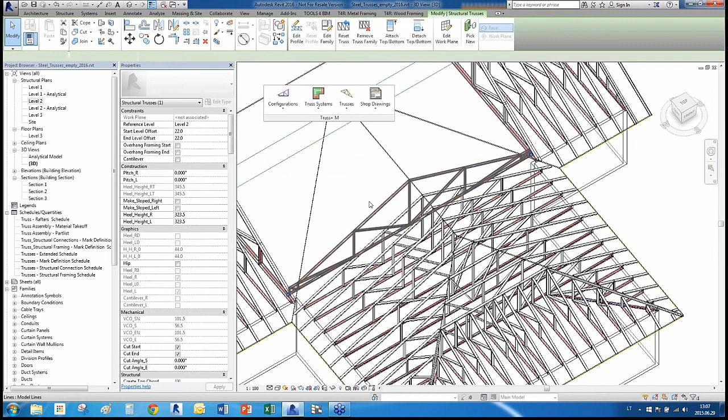And yeah, so let's go back to 3D view, and I will select this model line, and I will select insert truss by model line command. So for this you will just need to select the truss type. I select the truss type and I'll click OK, and now we will have truss inserted in the place of this model line, but also updated according to the roof. Okay, you can see now that we have here truss. It's aligned to the supporting truss.

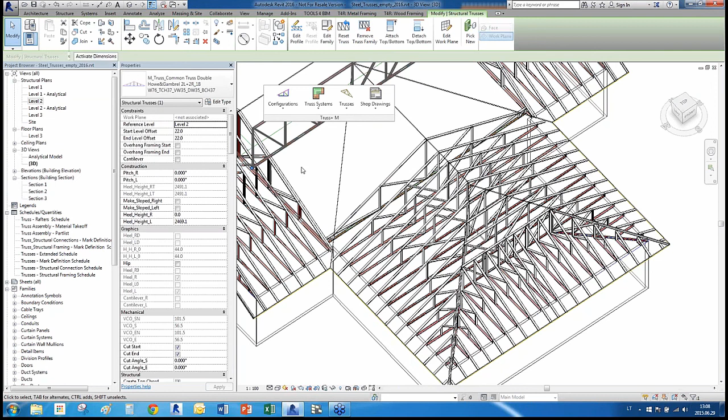Okay, let's see if we have. Okay, this model line should be also stretched to this situation. Let's go and let's use this one. Okay, let's go and insert another truss here by using the same command, insert truss by model line. Okay, let's pick the truss type with a double pitch for the double pitched roofs on each side. And okay, so we have here now one truss and other truss.

So I select one and second trusses, and I will use now command auto copy two trusses. So we have a configuration window to make a spacing, and if the spacing will be less than 600, the less spacing will be left in the middle, and we choose option update from the roof and click OK.

So what we did now, we select two trusses and we insert trusses between these trusses automatically. The same type of the trusses, with the same spacing which we define here, but now trusses are updated to the roof, so we don't need to do it manually, inserting one by one.

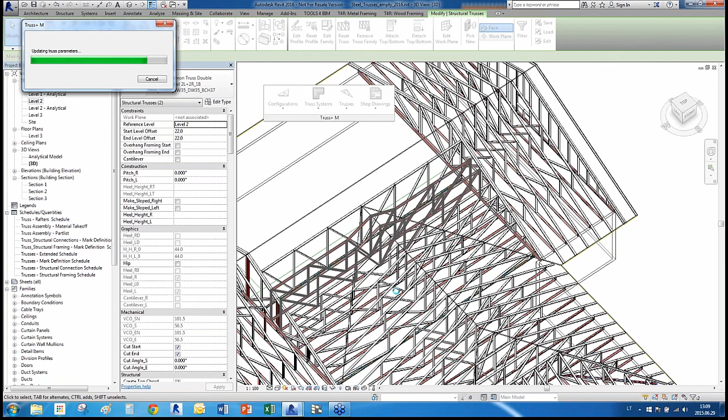Just insert these trusses and watch how it goes. So you can see now the truss is inserted and then updated according to the roof. So you don't need to work hard for this. Yes, and you can see now that we have here all these trusses inserted, and they are adapted according to the roof shape.

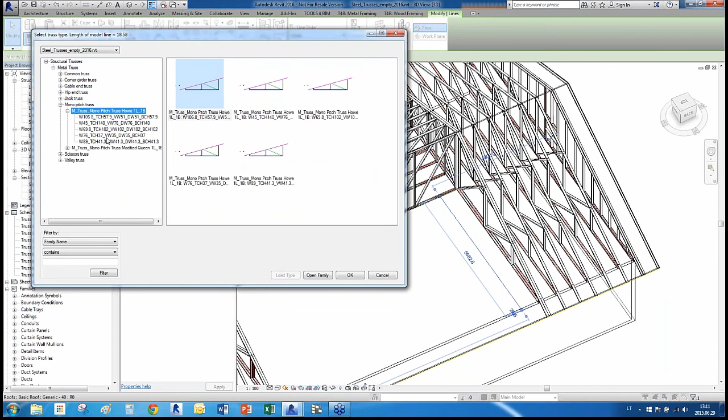Okay, let's just finish with this roof. Insert another truss in the middle. Let's pick again. I'll just pick the same type of truss. And yeah, I want to have this monopitch truss now here. So I have a model line again from the truss to the wall, and I'll select the same command again, but now we will use a monopitch truss. Okay, and let's click OK.

So all these truss types are loaded by default into your project, and you can create new types by using other tools and by picking the right sections of the framing. And yeah, we have a monopitch here now, and we can select another command now, whatever the number is, click OK, and you can fill the gap with the trusses.

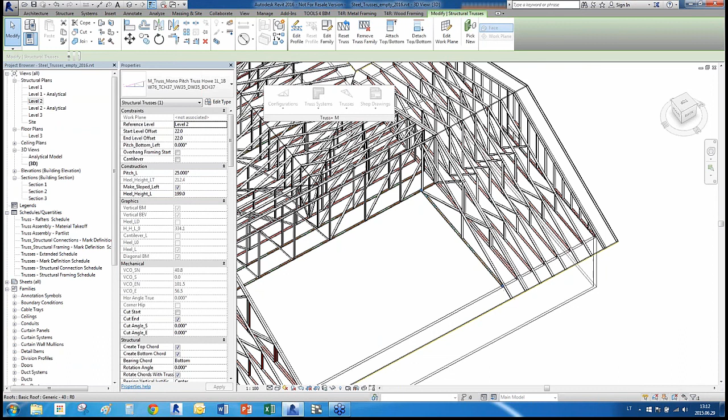Okay, so these are basically the main commands for your work to create the trusses for your roofs. But when you have non-standard situations, let's close this one and go to this project. You see that we have different shapes of the roof, and we can't use the same commands for these roofs. So we have a tool to complete such a situation. Again, we have a model line here, and we have a different shape roof here.

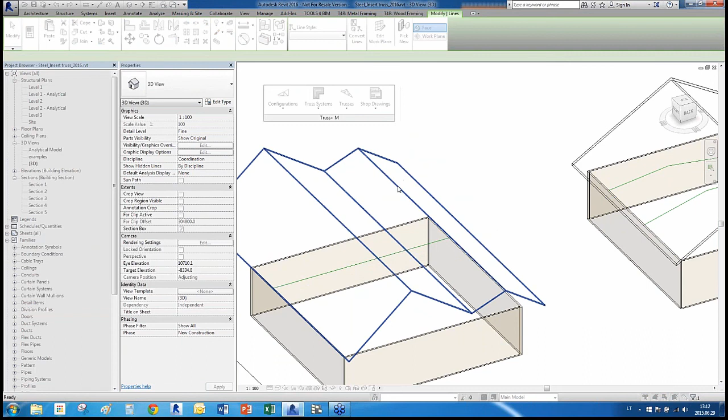So I will select the model line, and I'll use now the command to create truss type from model lines, and I'll select the roof. And now you see that the roof defines the top chord of the truss, and the model line defines the bottom chord of the truss. So I just need to draw the webs of the truss. You can see here we have snap points, and I will click OK. We have here a window for saving this kind of truss type.

So yes, now we need to wait, and we will see that we have this complex shape of truss inserted. Okay. Yes, and now we have this truss inserted according to the roof with the predefined elements, with just a few clicks. It's much easier than doing it in the Revit truss editor, and you have here the truss type already created.

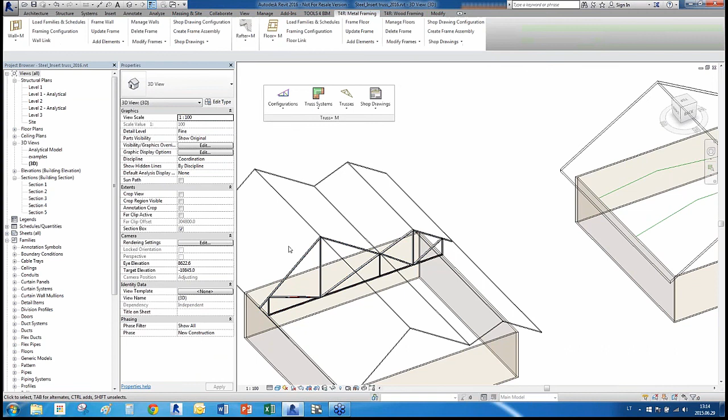And of course you can do another trick. If we have a model line like this, which is not a straight line, you can select all of this and create truss type from model line, and then again select the roof, and you can see that the bottom chord is not straight. It's the same shape as the model line. So you can add some webs as you think will work best for you, and just click OK.

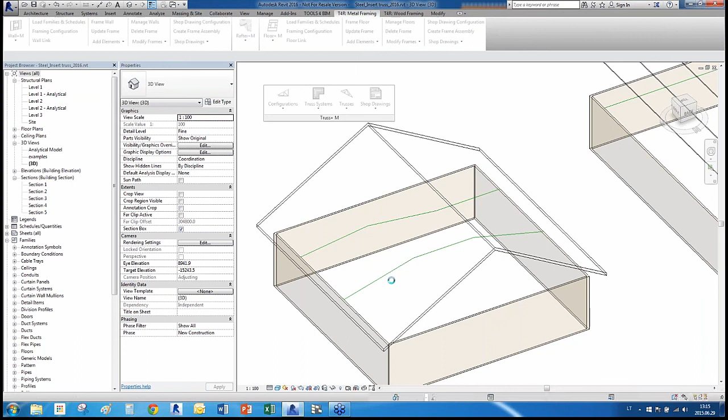And okay, let's create a new truss type, and let's see. And now you have again a complex shape of truss inserted. Yeah. So with these commands, basically, you can solve any configuration, any shape, any complexity of your roofs. Okay. A few more seconds, and we will have our truss. Okay. Yeah, and now you have a family type with a different name, with these profiles, which are selected in configurations.

Okay, so that's what I want to show you with inserting elements. But when you work with trusses, you also have the same possibilities as with wall framing. You can also make shop drawings, sort trusses, sort by ID, tag them and so on. So it's basically the same procedure as in the wall framing solution.